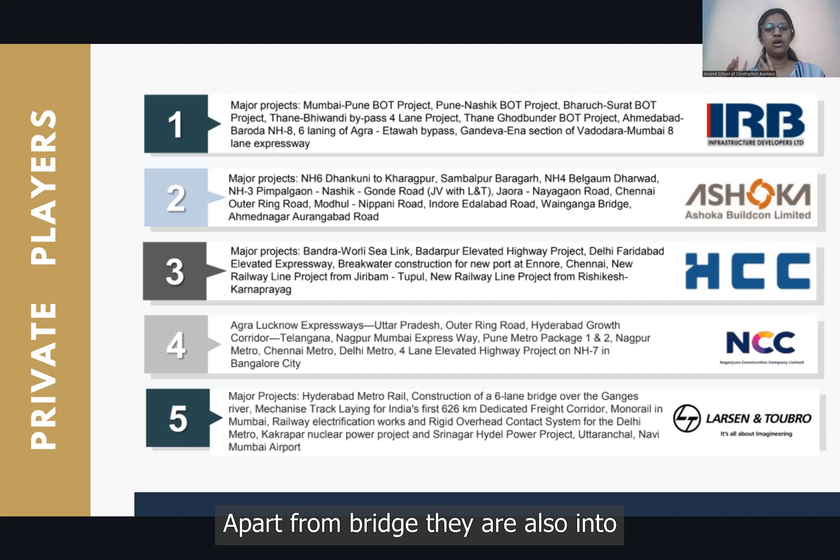Apart from them, we have Ashoka Buildcon Limited. They are majority into bridge construction, and apart from bridges, they are also into national highway construction projects. They are handling major projects of their own.

Then definitely the Hindustan Construction Company, where they have projects like the Bandra Worli Sea Link, which is already in operation currently. That is one of the major projects handled by them. Apart from that, they are in hold of the new railway line coming from Rishikesh - that is one of the projects handled by HCC.

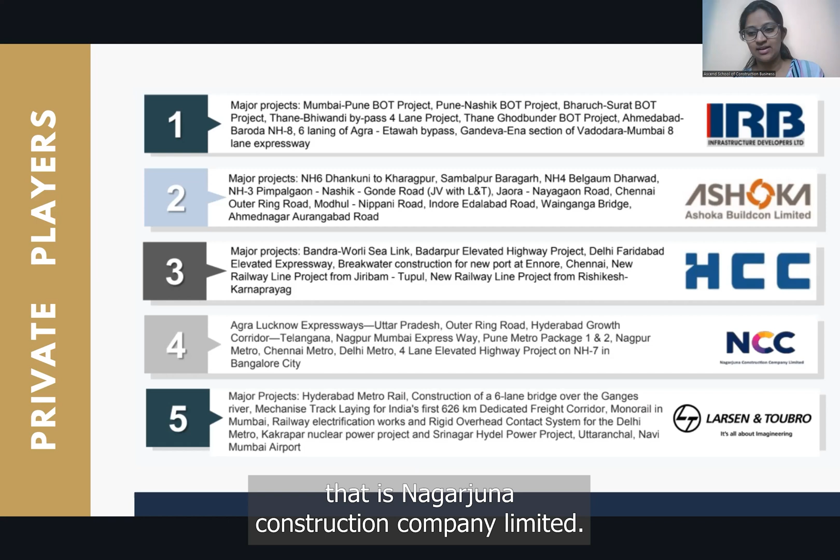Then one more major private player in infrastructure is NCC, that is Nagarjuna Construction Company Limited. They are also into majority of the highway construction, like the Uttar Pradesh Outer Ring Road, the Hyderabad growth corridors, or the Agra-Lucknow Expressway. These are the major projects handled by Nagarjuna Construction Company.

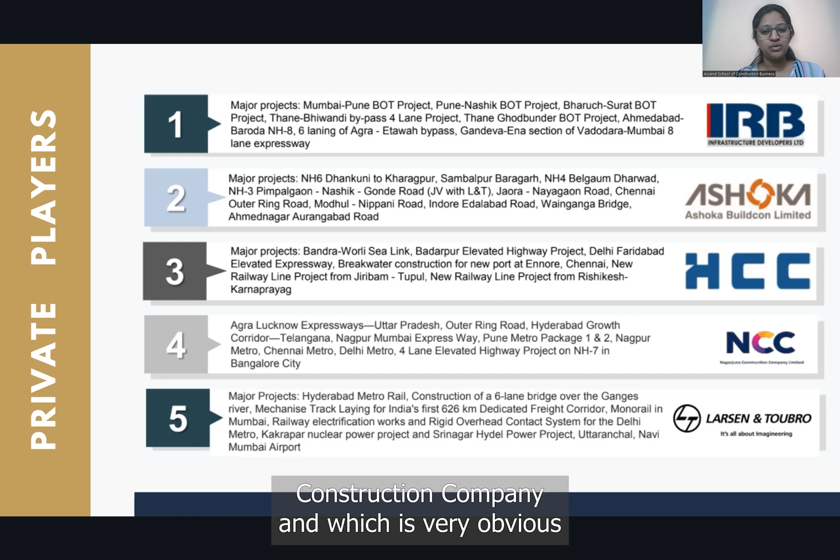And which is very obvious, we have Larsen and Toubro, that is L&T Constructions. They have dealt with a lot of 6-lane bridges over the Ganga. Apart from that, they are into the Hyderabad metro lanes, and also they have contributed majorly on the Statue of Unity. These are the major projects where Larsen and Toubro have contributed, one of the biggest private players in India.

Apart from these big private players, we do have others, like Reliance Infrastructure, Afcons, and IRCON. The IRCON International Limited basically deals with most of the turnkey infrastructure projects. And then we have JP, DLF. Tata, of course, is one of the major players in the infrastructure sector, dealing with huge projects contributing towards the nation. Shapoorji Pallonji have also stepped into infrastructure development.

So these are other private players - this is just to give an idea of which players are actively there in the market currently. Being a site engineer, you should definitely know the competitors, who are the ones actually fighting for similar projects that you have been working on. Keeping all of this in aspect, we are giving out the various private players who will be taking part in infrastructure projects.

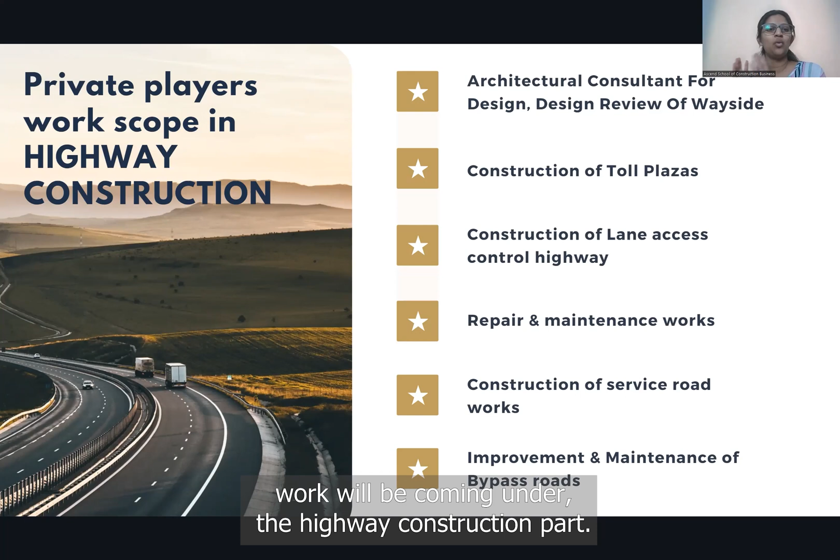Then we have improvement and maintenance of the bypasses. As I mentioned, there are 2 towns, so there should be connectivity between them. Just in case the traffic or demand for this particular road grows day by day, they have to divert the traffic by having bypass roads, so traffic can be diverted and the whole highway junction will not be disturbed. All of this work comes under the highway construction part.

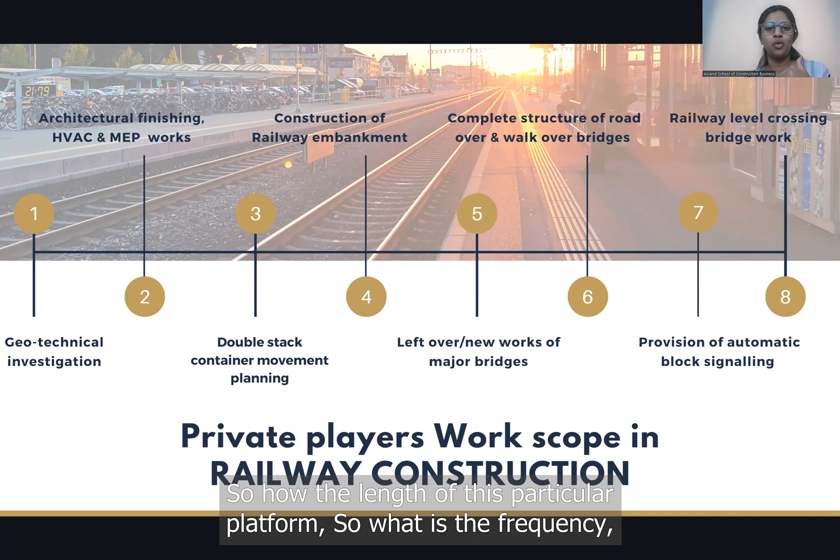Then we have the construction of railway embankments. This is about platform designing - the length of the platform, the frequency of passengers taking that particular railway station, and the different connectivity from one railway station to another. It can be local or sub-local.

Then we have the leftover or new works of major bridges. Platform wise, railway station wise, railway lane wise, it's all clear now. So now it comes to crossovers, or crossing the river banks - that's where major bridges come into the picture. If there is a train crossing from one bank of the river to the other side, that bridge construction also comes under the railway construction part. This includes the complete structure, or even a road-cum-railway bridge that is already currently in operation.

Maybe we have walkover bridges also. When there is a railway network going straight, but there are 4 to 5 railway lanes across, it will be difficult for the public to move from one embankment, one platform, to another. That is where walkover bridges come into the picture, and all of this scope of work definitely comes under the railway construction works itself.

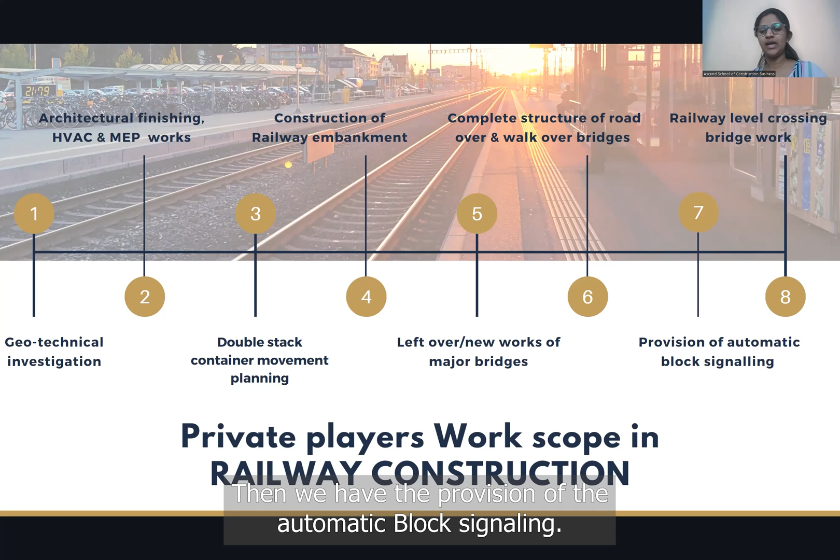Then we have the provision of automatic block signaling. What majorly happens here is for the crossing purpose - there is a change of railway lanes, where a train's movement will be crossing over to another lane. This is where automatic block signaling comes into the picture, designing where one train will be waiting for the crossover lane so that the other lane is free, and then it can swap towards another lane. This whole planning comes under automatic block signaling.

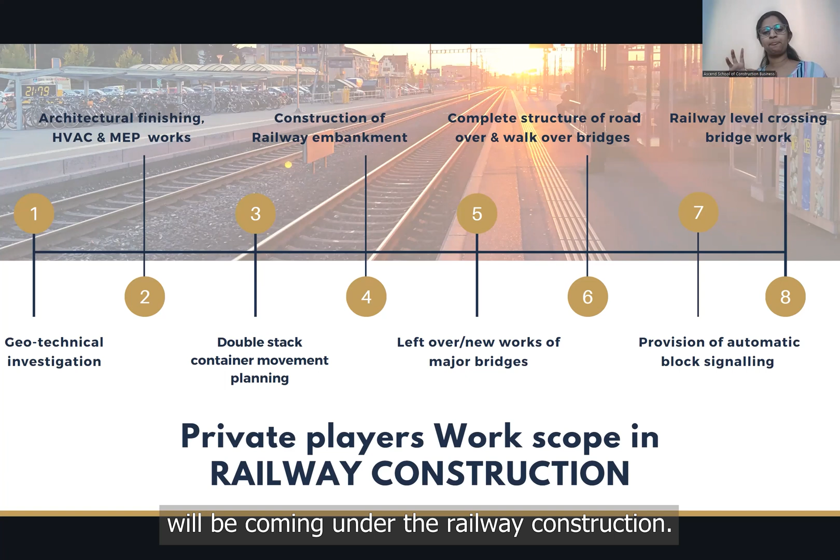Moving forward, we have railway level crossing bridges. Like I mentioned previously for walkover bridges, in a small city or town, a railway lane will be crossing over. That railway lane should be leveled up where it connects to the normal road. If the road network is happening horizontally and the railway network vertically, there is crossing of traffic happening with respect to roadways and railways. So here, railway level crossing and bridge related work, if required for that scope of work, all comes under railway construction.

So in metro construction, there are two types of construction taking place. One is the viaduct construction. Viaducts are the above-level stations. So above the ground level, pillars have to be constructed, and then segments will be joined together, and then we have the stations above the ground.

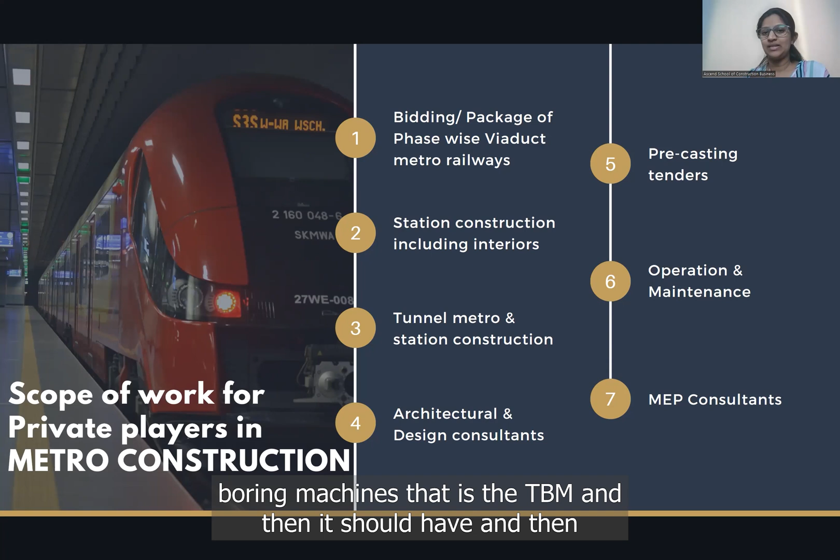One more, we have the underground metro stations. So in the underground metro stations, we'll have to be coming across tunnels, making use of the tunnel boring machines, that is the TBM, which have to be passing across. So these are the two different ways of metro construction taking place.

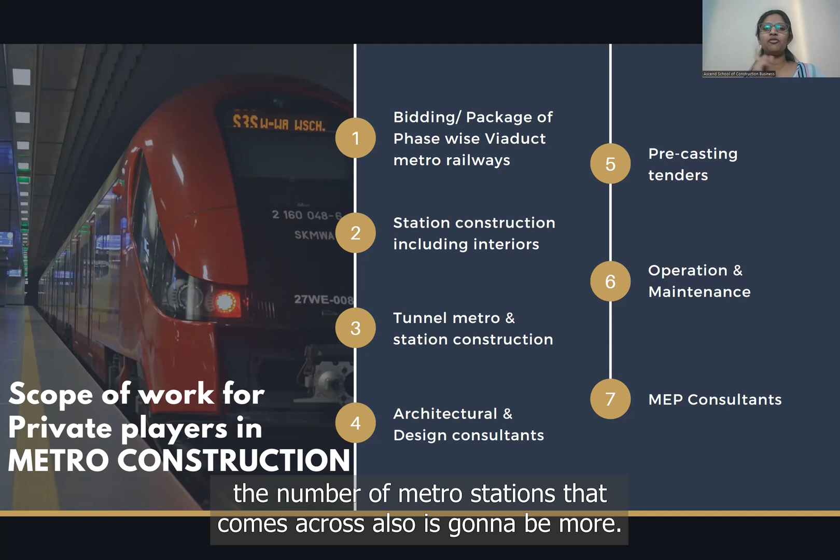Then coming to the station construction, including the interiors. For every metro station, say for example one metro station to another, it will be having a span of about 3 to 5 kilometers. Basically from one area to another area of the city where people will be commuting. So when the span of this metro station is small, the number of metro stations also increases. And the number of people, especially during peak hours and sometimes off-peak hours, all of this should be considered.

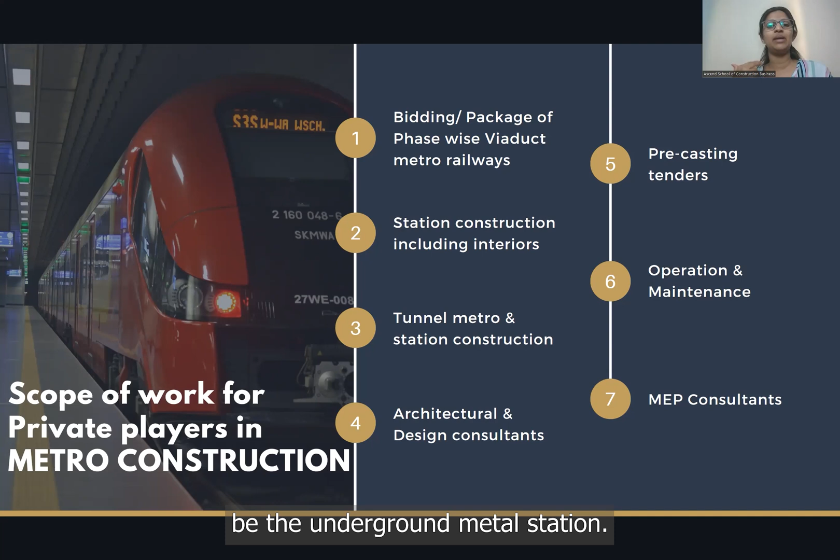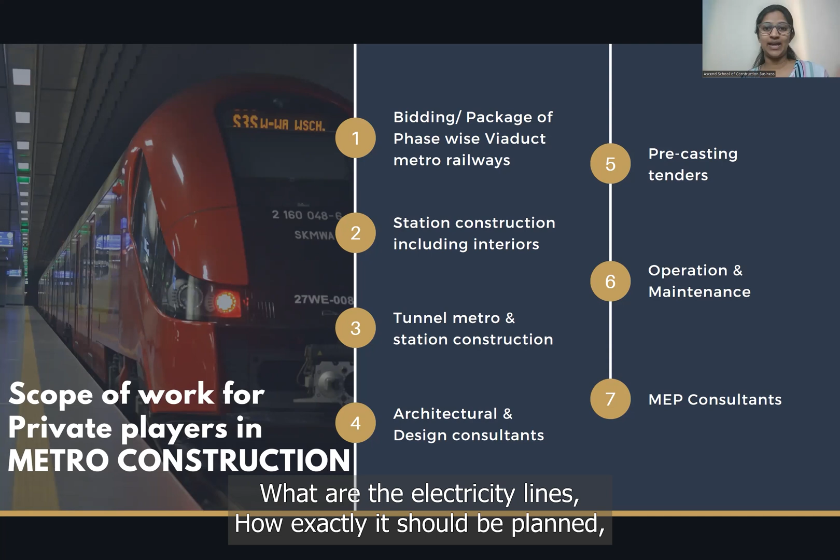So whether it is the station above the ground, or the underground metro station, all of this station construction, including the interiors - the flooring, the kind of paints used, the light fittings, the electricity lines, how exactly it should be planned, how the wire lines should be run - all of this planning comes under the station construction and the complete interior part of it.

Then moving forward, we have the tunnel, metro, and station construction. Usually in an underground metro station, the platform is a common platform where both metro lanes are on either side. Whereas when the station is above ground, platforms will be on either side and the metro lanes will be in the middle. So this is a general design, and that is a small difference between the station above ground and the underground metro station.

So the design of the whole metro station changes depending on whether it is above or below ground. And then we will be having the architectural and the design consultants.

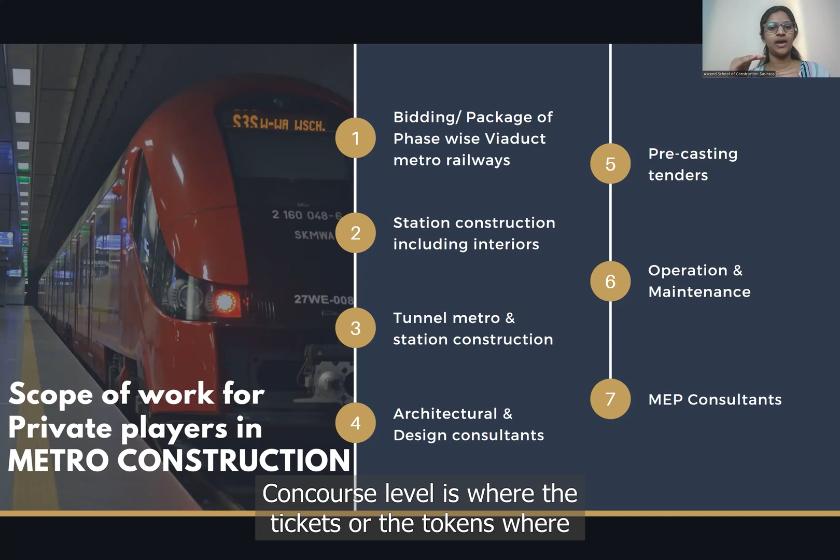Now when it comes to the stations, there are three different levels. One, we have the concourse level. Concourse level is where the tickets or tokens will be provided for passengers to collect, and the security check and all of those things happen. Then we have the platform level, which is going to be slightly higher, and then something called the railway level.

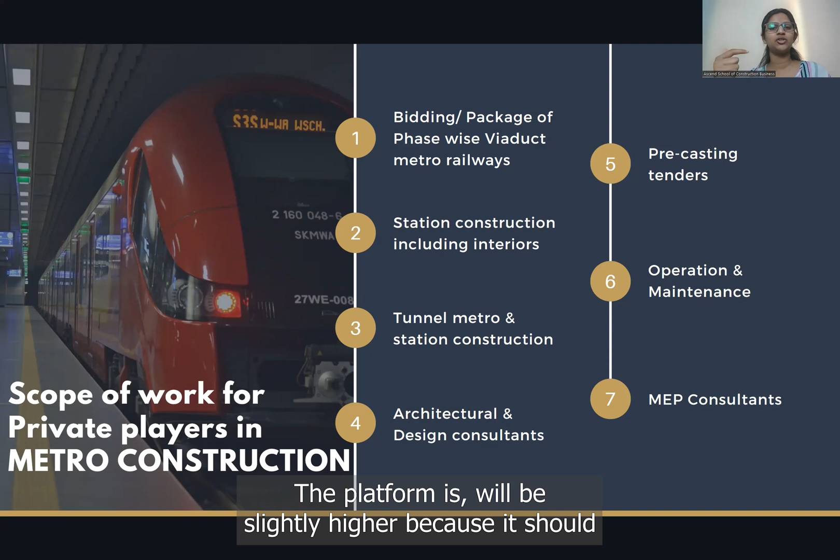So the metro lane level, where the movement happens, is completely different. The platform will be slightly higher because it should be easy for the person to go inside and come outside the train. So all of this designing will be covered under the architecture and the design consultants.

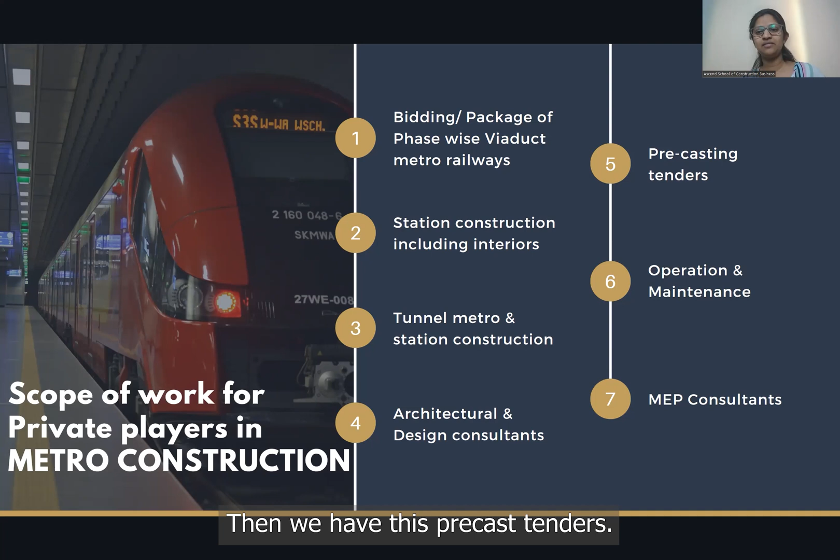Then we have these precast tenders. Like I mentioned, there are so many viaducts connected from one segment to another. We will get into the deeper part of metro construction in our upcoming sessions, where we have taken up metro construction as one of the major projects. So the construction sequence of activities we will concentrate on there - I'll be talking about the precast tenders completely there. And then we will be having the operations and maintenance.

If there are any faults along the railways, or any leakages happening in the tunnels, all of these defaults should be regularly corrected and inspected. These things come under operation and maintenance.

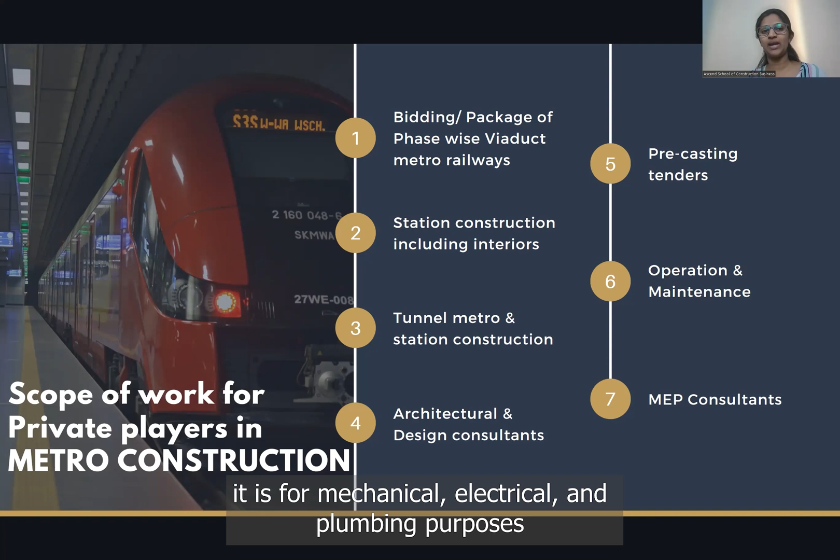And of course, we will be having the MEP consultants, for mechanical, electrical, and plumbing purposes, their own scope of work. There will be the metro station, ticket counters, a staff room for the operations who will be monitoring, and apart from that, washrooms. All of these things will be covered there.

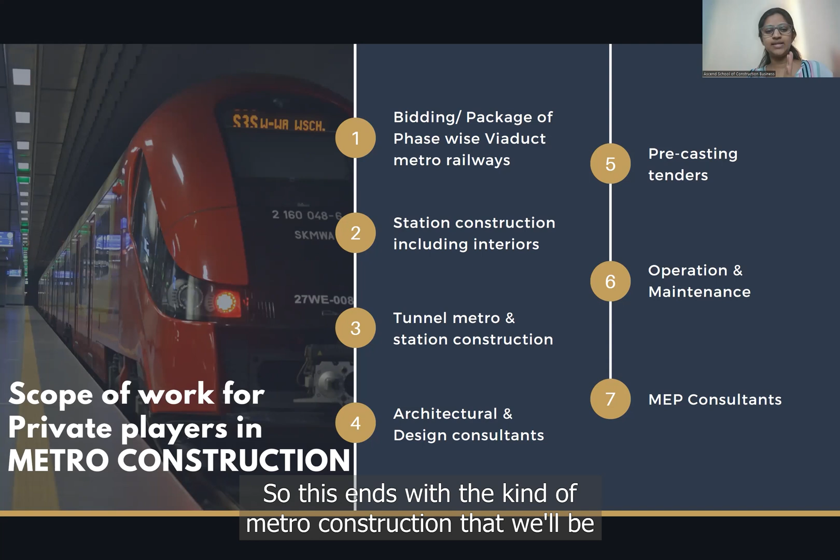In depth, I will be talking to you about the sequence of activities of the metro construction, which is very interesting. That will be coming in the upcoming video, so we can talk about it there. So this ends the kind of metro construction that we'll be dealing with.

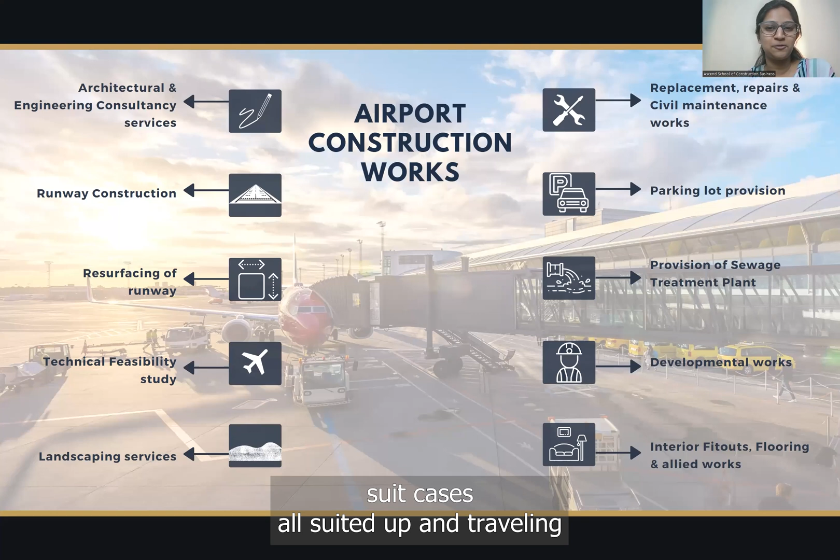Now moving forward, this is the last one where we will be covering the airport construction works. Airport construction work, airport by itself is very aesthetic in nature, very beautiful to walk through. There are a lot of travelers moving around with their suitcases, all suited up and traveling places. But similarly there is a lot of scope of work behind a beautiful airport that comes into the picture.

So when there are a few repetitive things, or a few very obvious ones, like the architectural and design part, I can skip across those, but it will be different from one scope of work to another.

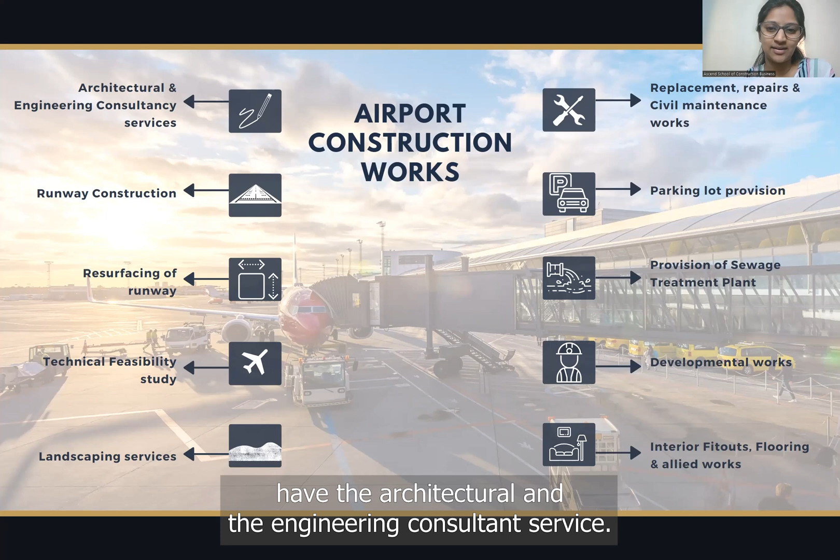So coming to airport construction works, we have the architectural and engineering consultant services. This is the complete design of the airports, for the runways, for the crossover lanes, for the waiting of the flights, or where we'll be picking up all of these passengers. All of this particular design will be taken on by the architectural and engineering consultants.

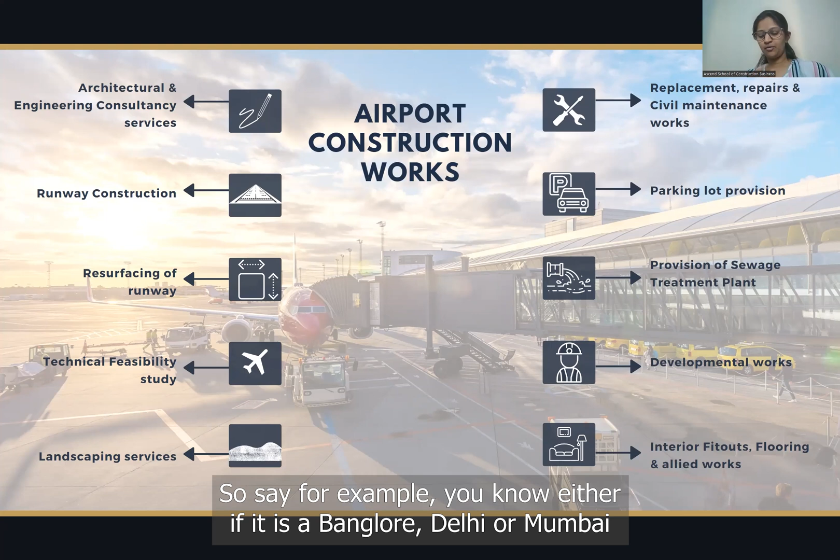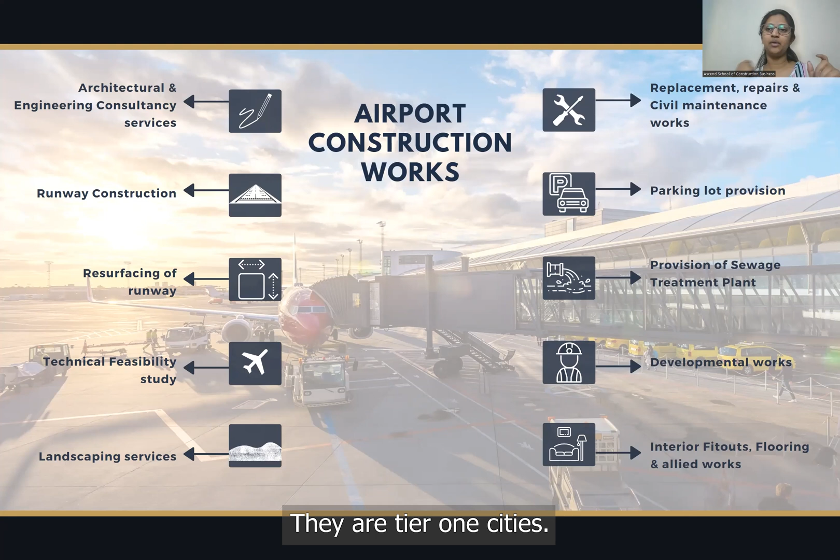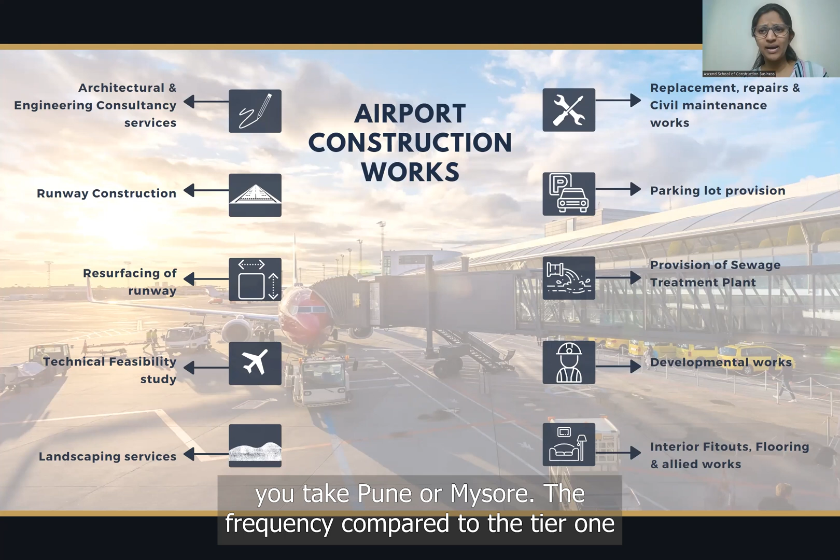And then moving forward, we have the runway construction. This basically considers what are the platforms, and what is the frequency of the flights taking place. For example, Bangalore, Delhi or Mumbai airports are comparatively going to be of higher frequency because they are metropolitan, tier one cities, where a lot of international and domestic flights take place. Whereas if we take tier 2 cities, like Pune or Mysore, the frequency compared to tier 1 cities is going to be a little less.

So based on that, the whole runway construction has to be planned. The runway will have to be planned as either flexible pavement or rigid pavement, whichever is best suited for that particular airport. And then coming to resurfacing of the runway.

This is again about any faults, ruttings or other defects along the runway, because that will be disturbing during the time of takeoff, when there is immense pressure given on the runway. So runway designing is completely different from a regular highway construction. This is where resurfacing or complete maintenance happens, if there are any cracks for the runways, and also for the landing purpose, where there is a series of lights navigating the flights to land. All of these things come under resurfacing and runway construction.

Then comes the technical feasibility study, which covers the technical aspects required for airport construction, including the materials, the equipment required, construction related materials like higher graded concrete, cements for runways, what grades of concrete are used, and also the kind of paint that will be run across the runway.